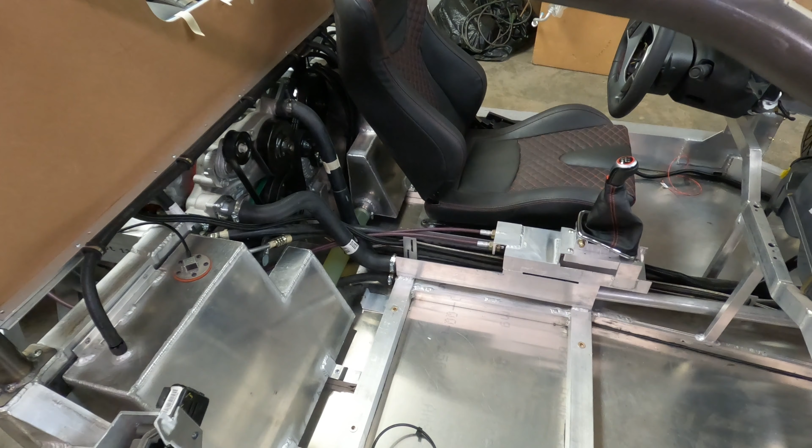I ordered parts to switch these two radiator tubes. I'm going to switch them temporarily and make sure everything works correctly before I take the time to switch them the correct way. For right now, I'm just going to switch these two rubber tubes onto the metal pipes using some adapters and couplings, just to verify that the water flows correctly up through the radiators and the system cools. Once I know for sure, then I need to switch these two aluminum tubes in the car.

There's a 1.25 and a 1.5 tube, and I have them in the wrong position, and it's going to take a little bit of work to switch them. The one on top inside the car is pretty easy - it's not running through any holes or attached to anything permanent. But the one under the car is running through 3 or 4 different holes in aluminum tubing that will need to be opened up to a slightly larger size.

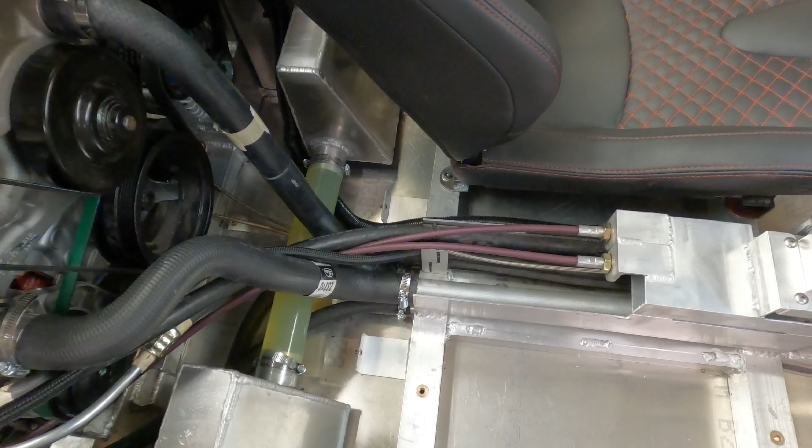So while we are waiting on those parts to come in, and before we get started on that, the next thing I need to do is model the rear glass and the windshield.

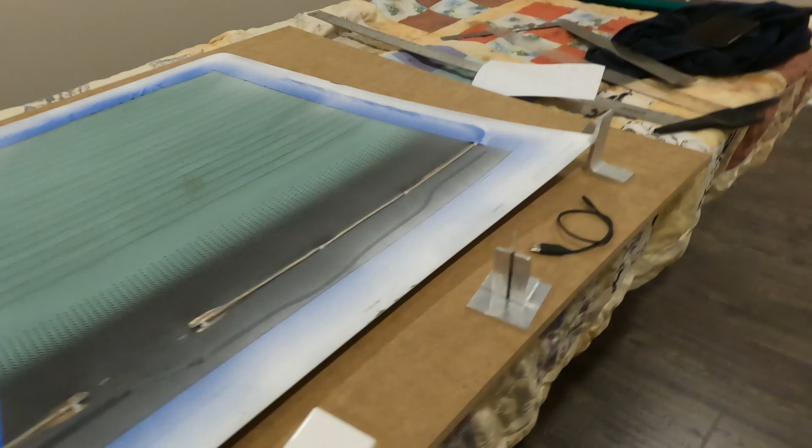This is the windshield laying here, and I had mentioned before that I was going to have a friend 3D scan them. I talked to him a while back - he did the door glass and had some trouble with it not being white, it was reflecting the laser. He asked me if I could paint the two and get them back to him. Because I was so busy it took a long time, and once I got these painted and contacted him to tell him they were ready, he said he had sold his company in January and no longer had access to the scanner. So that is my fault - I waited too long, I should have made it more of a priority.

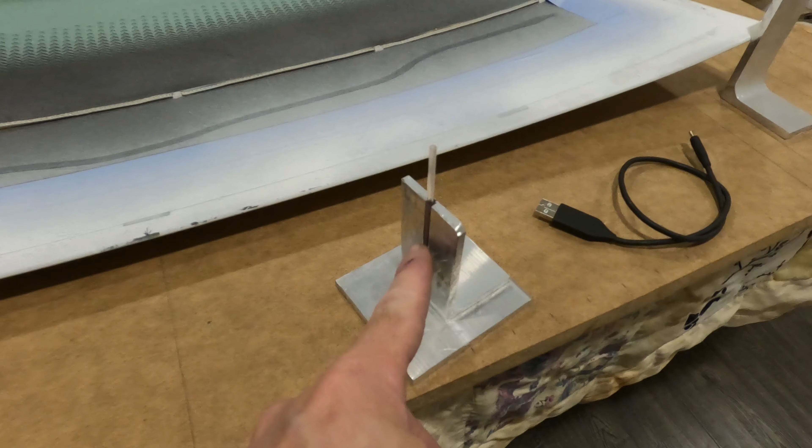I would have had these modeled in the computer, but now I need to do these the hard way, which is tracing them. I'm going to trace the perimeter onto this wood using this tool I made - it has an ink pen center running through a hole in the bottom, and I can walk this around the edge of the glass and it'll draw the perimeter on the wood. Then I'll need to take measurements, like every inch or so on a grid, and measure from the wood surface up to the glass. Then I can model a surface on the computer that is the correct shape, and come back and cut the perimeter size to match exactly.

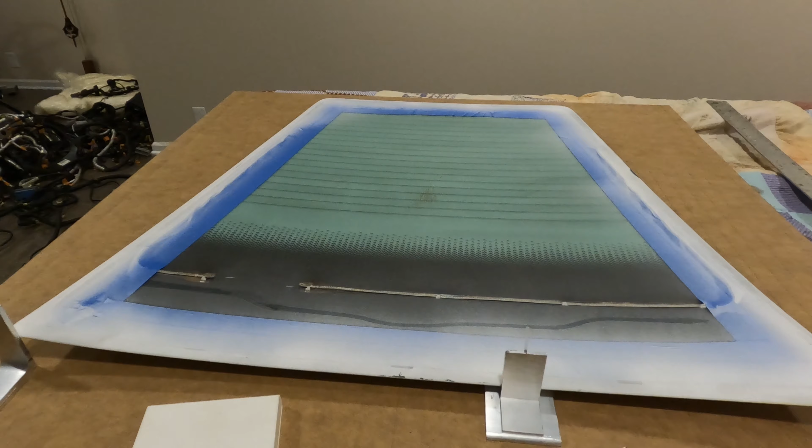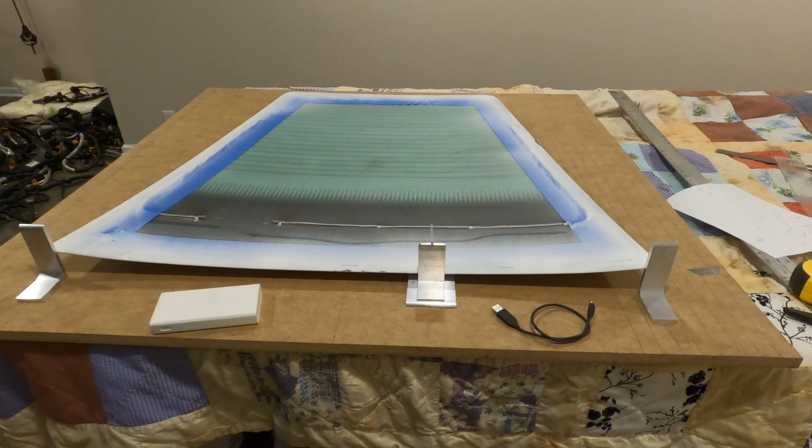I'm starting with the smaller, simpler rear glass, and if it works correctly and I'm happy with the outcome, then I'm going to do the windshield. The windshield won't quite fit on this piece of wood, but it's a mirror image, so I really only need to model half of it. In fact, I'll probably only model half of this one too and just mirror it - that'll work fine. But I'm not going to bore you with all of this, I am going to set the camera up and film just a little bit of it to show you how I'm doing it. So let's go ahead and get started on that.

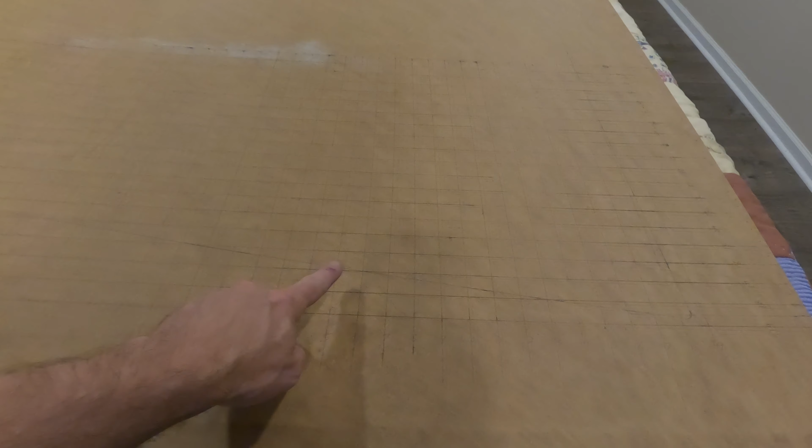So I have a 1-inch square grid pattern here, and all of the lines are numbered. I'll draw this grid on my computer and come across and plot points all the way around the perimeter. And then I'll lay the glass back up here and measure off each spot up, so I'll have the height of that edge of the glass all the way around the perimeter, or I'll just do half of it. Then I can model that in SolidWorks off of a surface, plot points, and then grow a line vertically the correct height off each point around the perimeter.

And I can create a surface off of that, and then once the surface is made, I can come back around the outside of this edge and cut that surface off, and it'll create the shape of this glass. Now, of course, it won't be perfect.

Let's see some of my lines. I mean, they're just not perfect on here. They're all 5 or 10 thousandths in places, but 5 or 10 thousandths is nothing on this model. As long as I'm within, I don't know, 20 or 25 thousandths on each point, I should be fine.

If you look at any production car, the shape of the glass to the body is not perfect. The shape of the door to the fender or a quarter panel is not perfect. They just don't align perfectly. But anything within 20 thousandths or so, you'll never see. It's very hard. The only way you can see some of them on production cars is if the sun is shining across them just right.

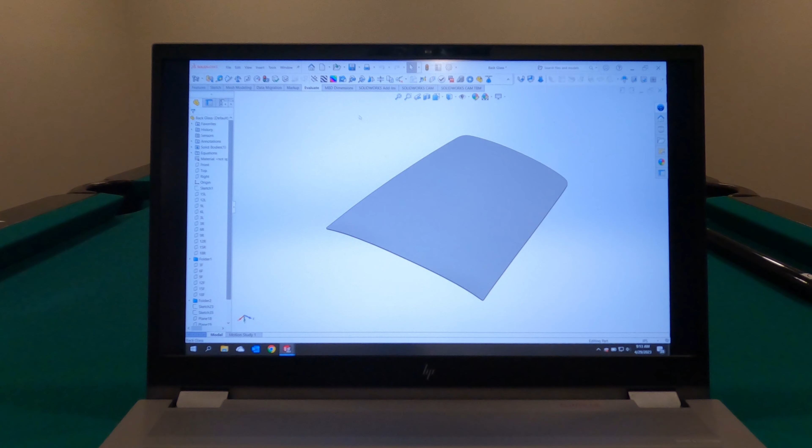And this is the back glass, and it turned out pretty nice. There's a curvature thing here I can turn on, and it shows any bad curvature or lines. You want it to be solid black. Anything that's kind of distorted will turn a different color.

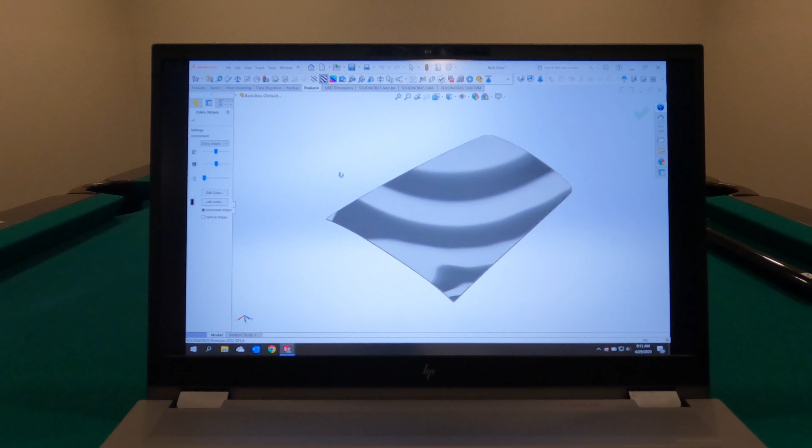There's also a feature here you can turn on, zebra stripes, and again, if there's anything really distorted, it'll show up. This is kind of like a high gloss reflection, so you can see everything is pretty smooth, nice flowing lines.

And let's go over to the windshield and I'll show you kind of how I did this. You saw me lay this on the wood and trace around the perimeter of it. You can see this perimeter sketch right here around the glass.

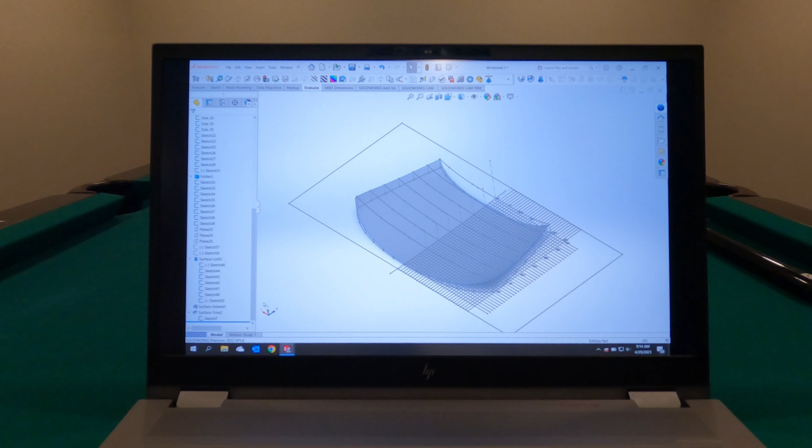That is the exact perimeter shape of the glass, and once I had that, I measured up from several locations. You can see these vertical lines here measuring up to points, and I used those points to create sketches like this that define the shape of the glass.

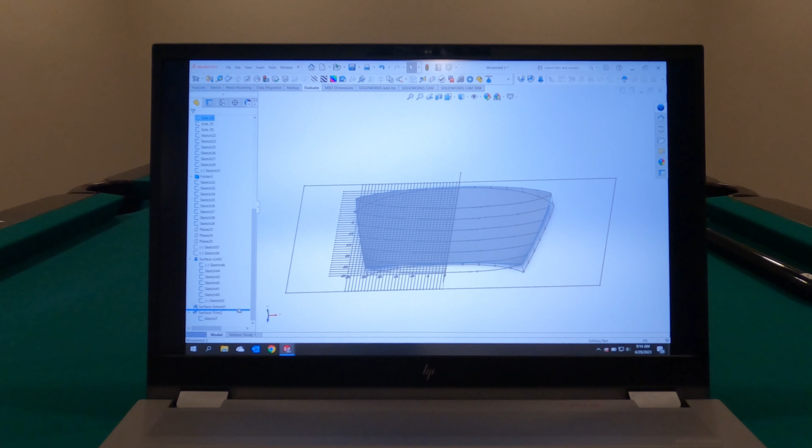And then once I get the shape correct, I extrude a surface to that shape that's larger than the glass itself, and then I come back and use the perimeter sketch and trim that windshield down.

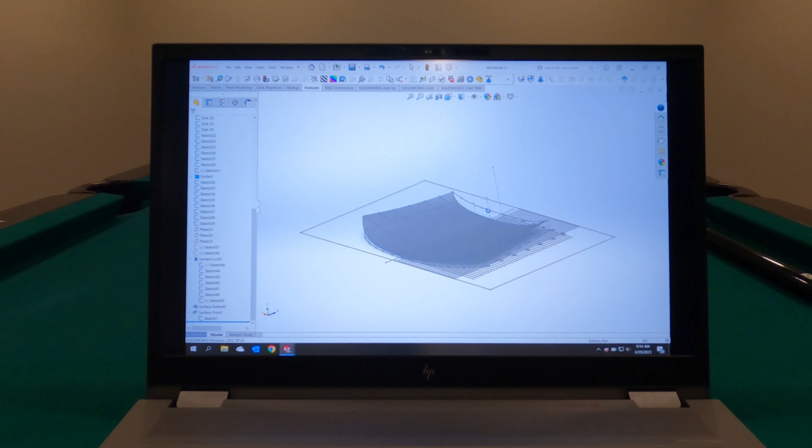And the way you check to see if it's correct is all of these points measured up from the table should touch around the perimeter of this glass. And everything looks really close. Let me hide some sketches here.

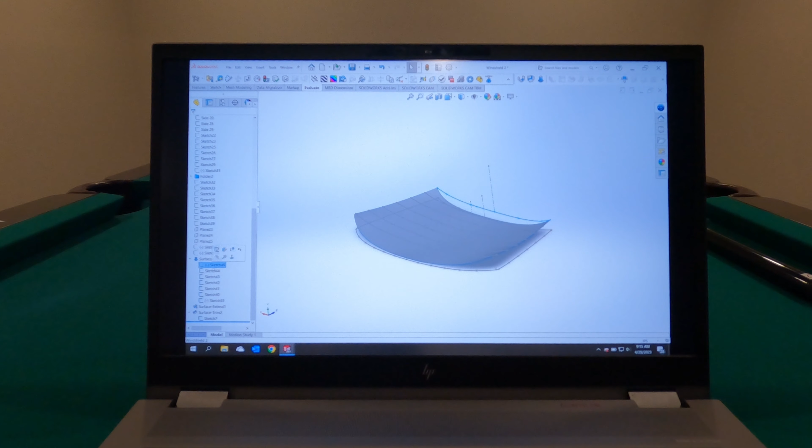Okay, and with all the sketches hidden, this is our windshield. And again, we can come up here and check.

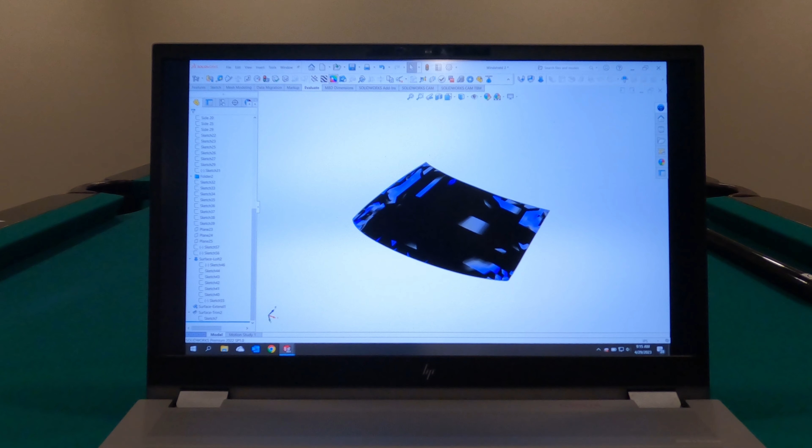And you can see it's mostly solid black, with just a little tiny bit of distortion in the corners. If we look at it with our zebra stripes, we get pretty smooth flowing lines. The corners are slightly distorted, but I believe they're close enough to do what we need to do.

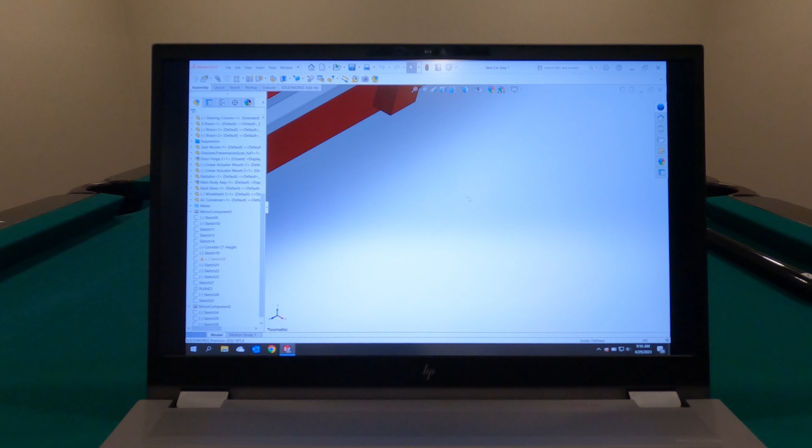Once I had these glasses modeled, I inserted them into my main assembly of the car here. And you can see, that was nice, you can see that they fit rather well. You can start to get a profile view of the car and see kind of what it's going to look like.

I'm ignoring this door glass, it's not quite in the correct position yet. I need to finish that today. And I have one more thing to show. Where is it? Oh.

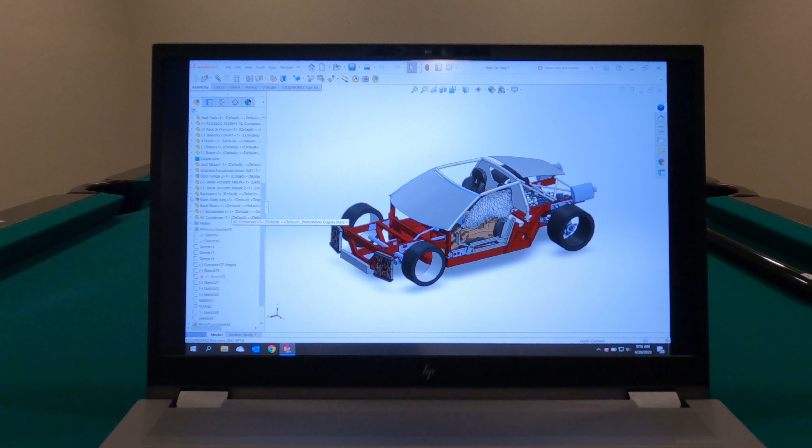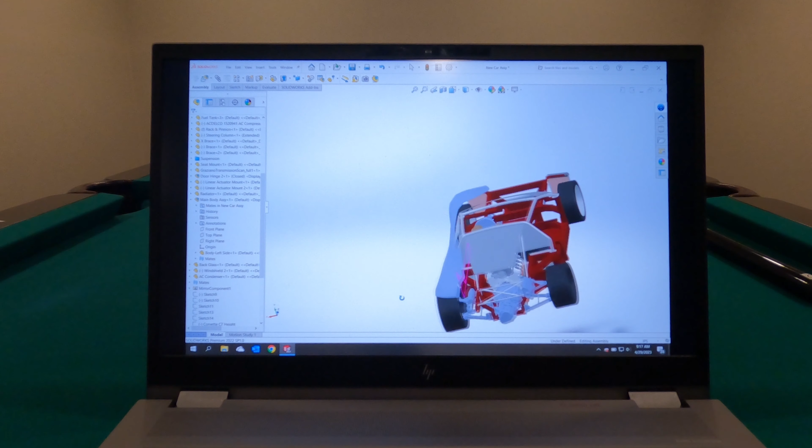This is a car body part that I had purchased a file on, a car that I like, just kind of getting some reference geometry. I imported this and scaled it to where it fit on my car body, having to scale it in all three axes, X, Y, and Z, to get it to fit correctly, and overlaid it on my design here just to see what it would look like, giving it a little bit of shape. You can sort of see the layout of the body starting to take place, and this is just for reference. This is not exactly the way the body is going to be shaped, but I was using this as a template to get an idea that everything was in the correct position.

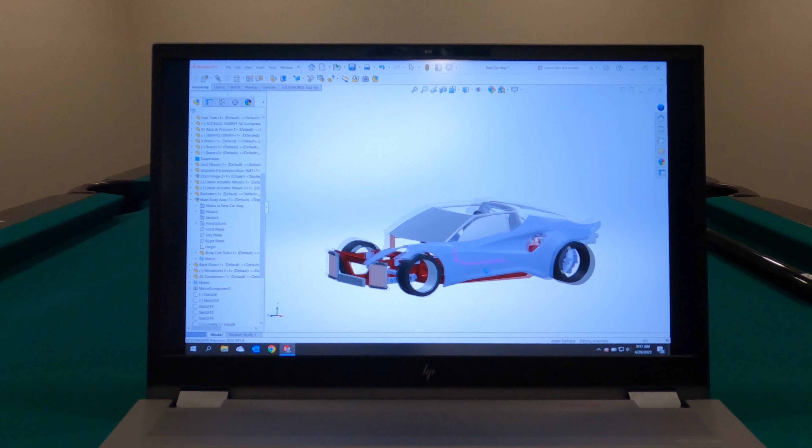But that's what we accomplished this week, and the only thing left for me to do, I'll finish up this door today, and then I need to start working on modeling the headlights and taillights.

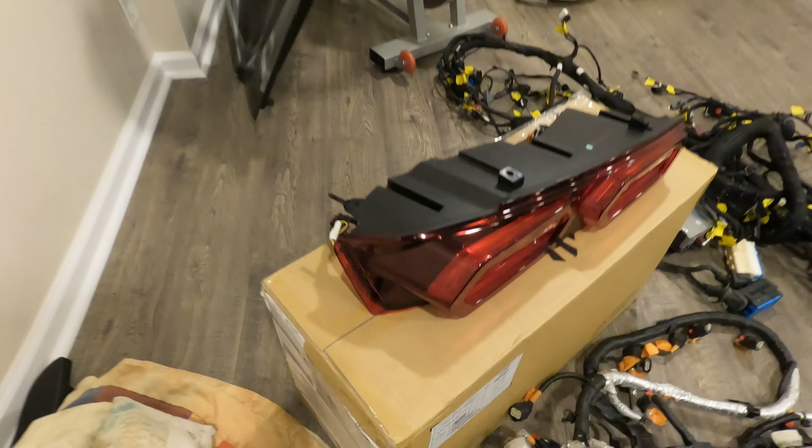And actually, the taillights I bought, they came in. This is one of the tail lights. I stumbled across this - it's an aftermarket light for a new Camaro, and it's different enough from the Camaro tail lights that it's not obvious to most people. I'd say 99% of the people out here, when they see this, will have no idea what it came off of or fits. And I like that, so they won't know I've stolen them off of another car, and I like the shape and the look of it. This is what we're going to use.

So next week I'm going to start working on these wiring harnesses. I've got to figure out exactly a game plan to use these harnesses, and most likely I will make new fuse boxes and not use these two factory ones, because I'm only going to use about half of the fuses and relays that are in these, so I want to try to slim them down.

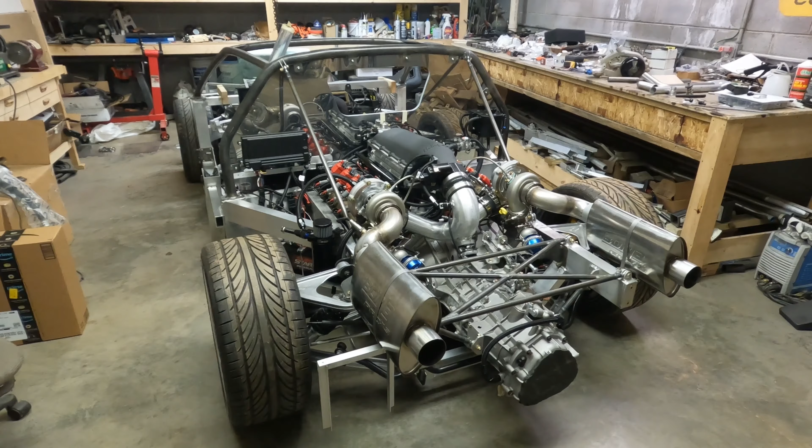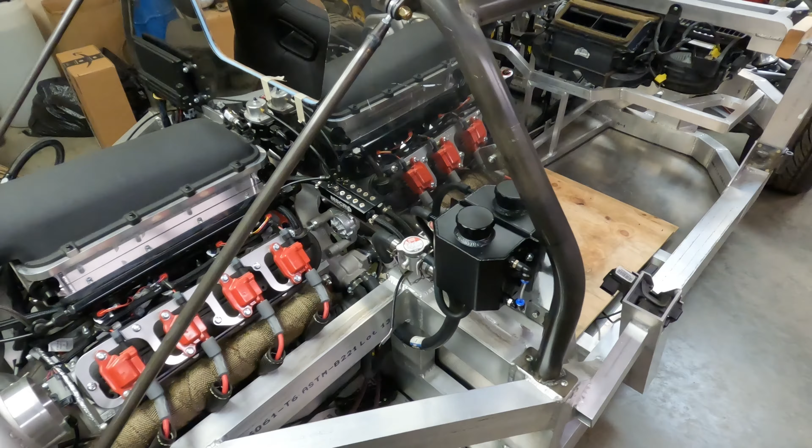Also here on the car, I was hoping to try to solve the cooling issue we have, and I have ordered a larger header tank. It's similar to this, but at least twice as large, maybe 3 times as large. I was expecting it to already be here so we could start testing and seeing if this solves the cooling issue, but it hasn't arrived yet. It's going to be here in 2 more days. So that is something we'll be working on next week, in next week's video.

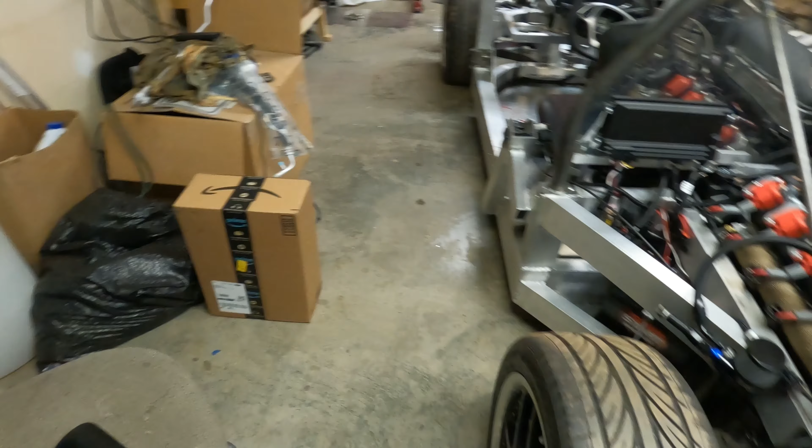And I think I have a solution to the cooling issue. I also bought a pump here in this box that will pull the air out of the system. One of the issues we're having is there's air trapped in the system in various points that I'm not able to get out. But you can hook an air compressor up to this, and it will pull a vacuum on the system and suck all the air out. Then when you reverse the valve, the vacuum pulls the coolant back into the radiator system and fills it without leaving any voids, so there's no air trapped in it. Once we have the header tank and this vacuum system on it, I am thinking and hoping that will solve my cooling issues.